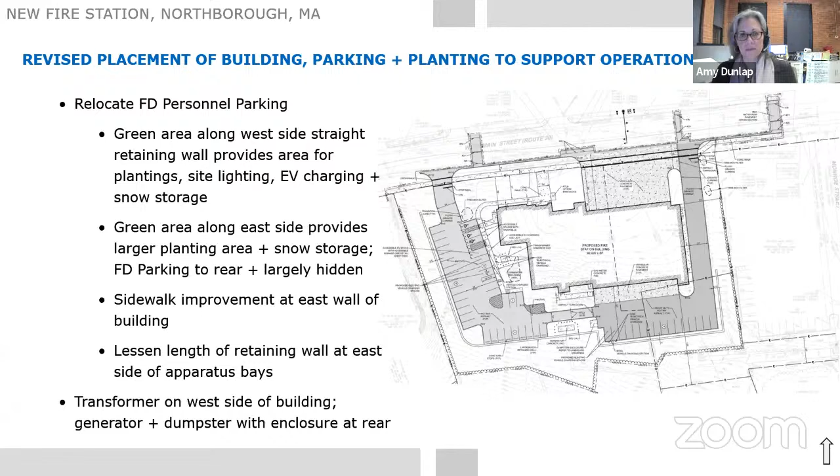The retaining walls were also presented at the last meeting, and I wanted to go through them to show what we're presenting to design review tomorrow. This is the straight wall we've been looking at, although it's been adjusted for the parking change in the back of the building. When we get to the cost estimate portion, the base estimate is based on a straight retaining wall like this, and then we've got alternates for a couple of options we're going to look at.

The straight wall isn't really totally straight here — it sets back about 2'10" from the base to the top of the wall at the high point, back in this corner. And then the overall height is the 30 feet as we've been talking about.

We did some sections through these wall options to help everybody understand what they might look like. This was something the design review committee had asked us to do to get a better understanding. When we presented, I think we presented 4 or 5 options to the committee last time we met, and we narrowed it down to 3 different options for further exploration.

The first was actually this batter wall option. So all of the options we're looking at, the walls on the east and west sides of the site have to be straight walls. There's not enough room between the wall and the property line to batter them or terrace them in any way, so those are always going to be straight walls. The difference happens back along the south wall for the site.

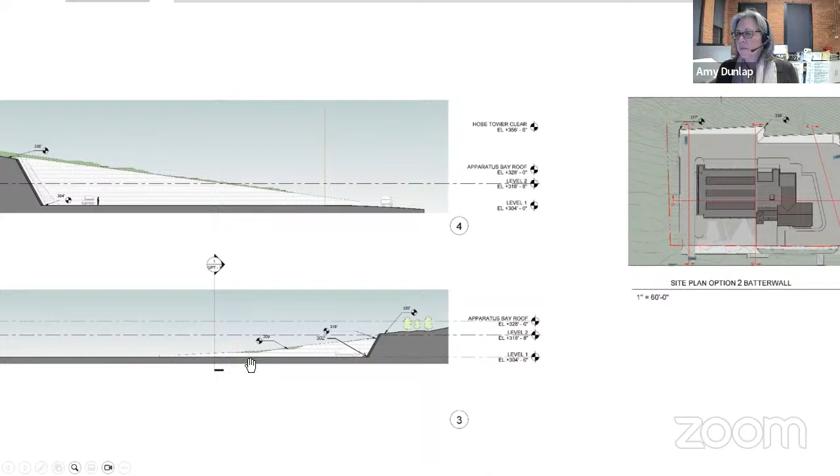This section here is cut actually right over here - it's cut off of my screen, but it's at the low point of the south wall. You can see there's a car parked there. The site is about 18 feet where this section is cut and continues to go down into the corner where it's about 14 feet high, and then it continues to slope down along the east side of the property.

And then looking here, let me actually, before I do that - the next 2 sections I'm going to show you is one cut right through the middle of the building in each direction. So cutting through the building from north to south here. The street is out here, the hill is up here. You can get a sense of the retaining wall.

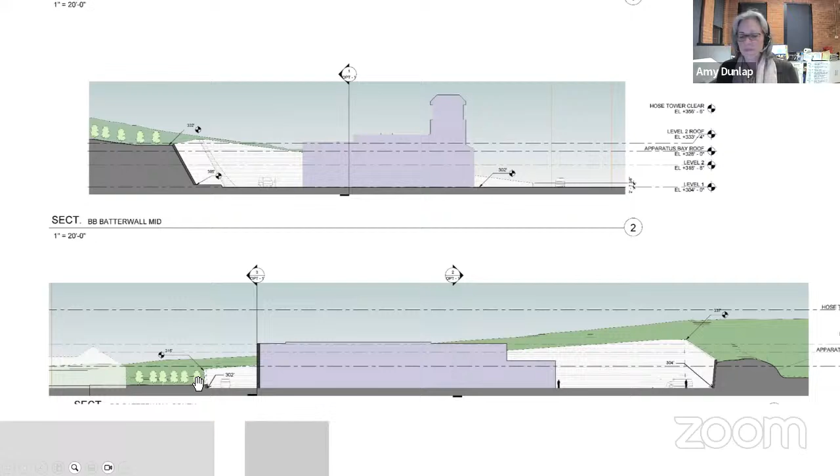The grade is at about 305 at that point, and at 332 at the top of the wall. And then this is cutting through the building, looking back at the retaining wall. You can get a sense of how the retaining wall slopes down from one side of the site to the other. So that's the batter wall option.

The next one that we discussed looking at a little bit more is a combination of a batter and a terrace wall. In this case, we have one terrace located right here, and then the rest of the south wall is battered. Looking at the section here, if I blow it up, we have the one terrace where we could have ornamental trees, shrubs, low plants, and then the wall continues up.

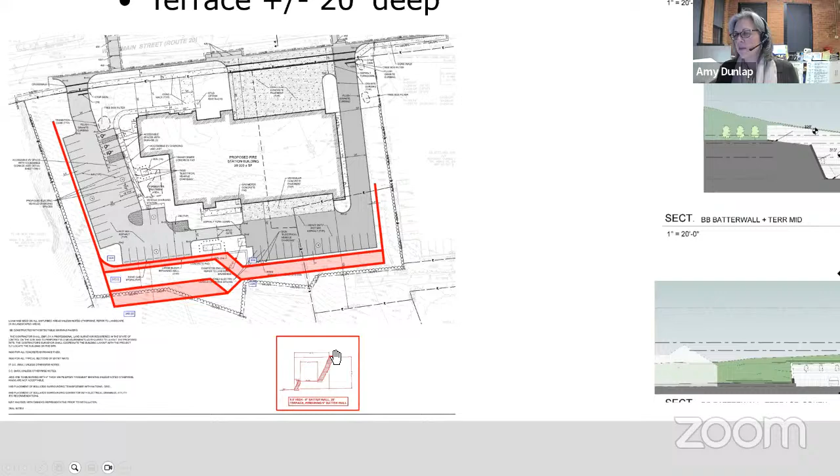And looking at the sections, the same sections we looked at before, you get a sense of that terrace here, which is at about 10 feet high in comparison to a person in a car. There's one terrace here with planting, and then we continue up. Again, this is at the low point of the wall.

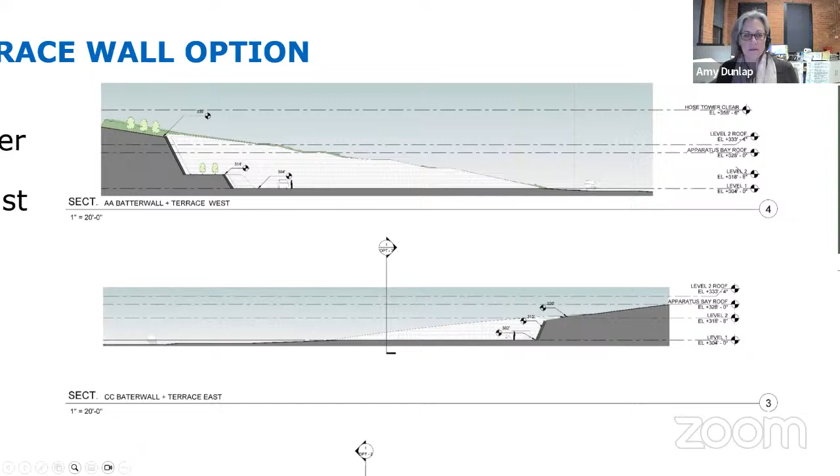And then cutting through the building at this point, we're beyond where the terrace happens, and we're back to a batter wall at this location. You can see the terrace right here in the distance beyond, and then you can see the terrace here in this elevation.

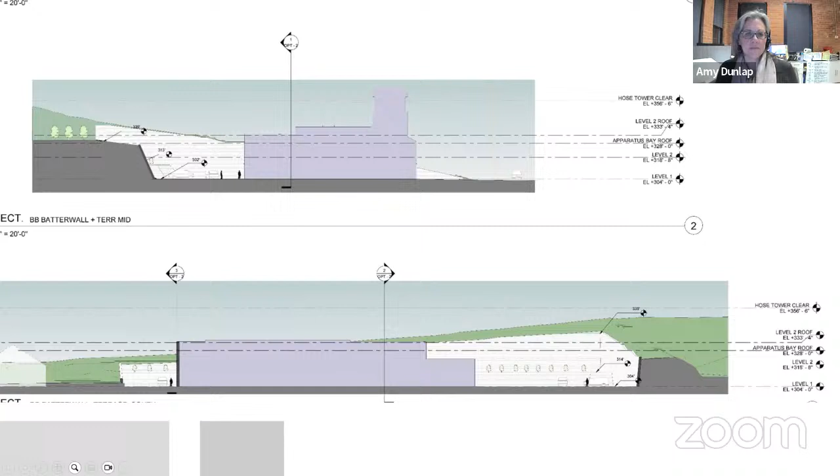This option was something that was developed after we sent the documents to the cost estimator, so we don't have a cost for it. It's something we should talk about when we get to the cost estimate - the estimate is done at a point in time and design continues. So this is something we don't have a cost for, but we do have for the terrace option here. So this is the terrace option.

We've got 2 terraces with planting beds on each of the terraces. You can see in the section here.

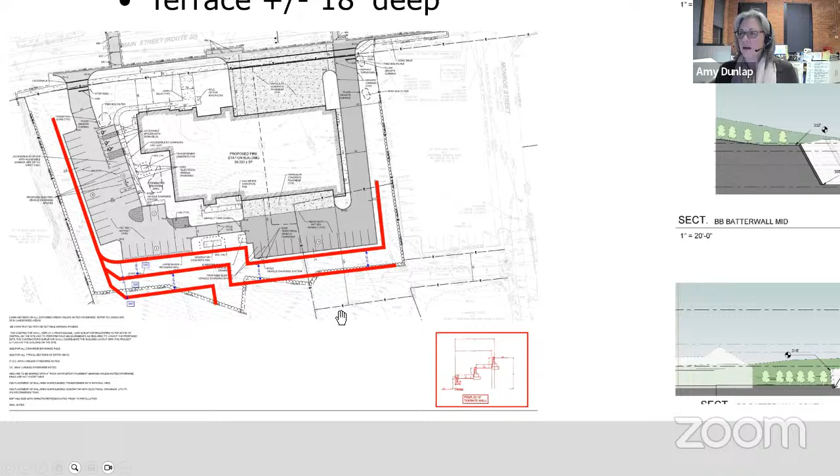One of the nice things about the terraces is that there's access into them from grade. In the previous slide, the batter and terrace wall option, there's no access from grade at the back of the site. There's a wall connecting the two battered walls, so accessing that for maintenance would require a ladder from the parking lot. But in the terrace wall option, you can access each terrace from grade because of how the site is graded.

Let's see if we go to the sections here. Sections do not look right. Those are not the right sections. Yeah, that's my fault, I'll find them.

Keep going, Amy. I think the next slide moves on to cost. Okay, give me a minute then. Let's see, I can find them. Does anyone have any questions while Amy's looking?

I have one question, Amy. What is the height difference in the previous terrace scheme, where you said there's a little wall connecting the upper battered walls? What is that height that prevents connection to Monroe Street?

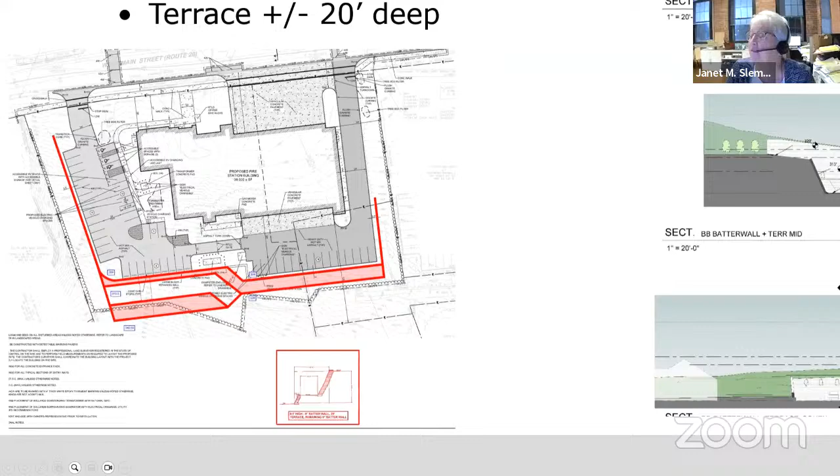Amy, I have them up on my screen. Do you want me to tell you where it is, or how are we going to do this easily? I don't know, I just copied the wrong one. I think I will stop sharing for a second and you can share.

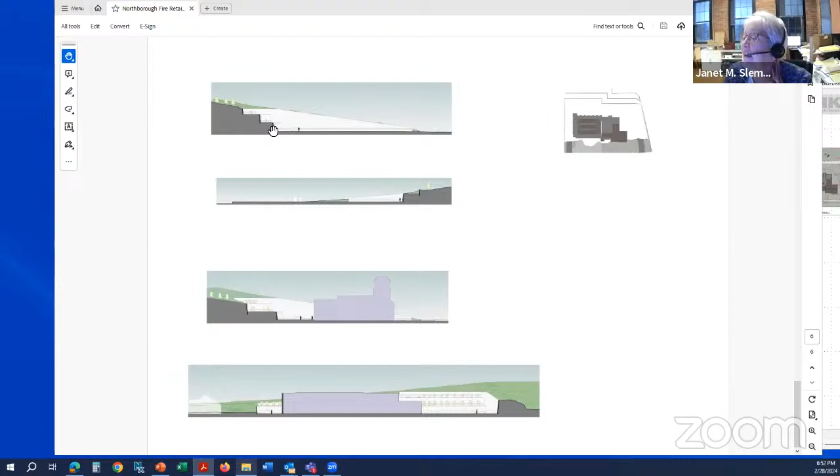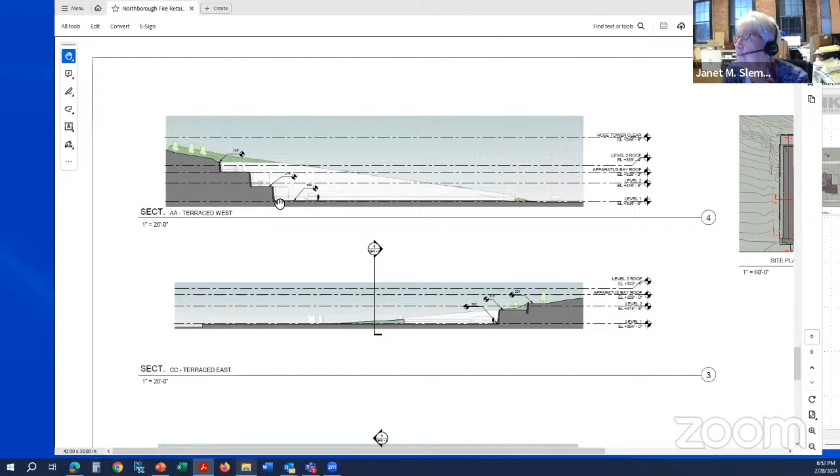Believe me, it's not fancy at this point, but tell me if you see it - the terraces. There's the plans, and this is the terrace, the two terraces at the high point, I believe, and these are at the low point. You can see the person. Let me see if I can get this a little bigger for you. You can see the people here, and those terraces are about 12 feet tall, I believe, between them, maybe. And then here's the building cross section, and this is what you'd see - two terraces here, and one on the back side on the east side.

So is that helpful for everyone to see those correctly? Sorry about that. I noticed that Diana has her hand up - do you have a question, Diana?

I know I always ask procurement questions, but how does this work with the contractor who would be responsible for building the walls? Do they just provide the landscape surface and then the landscape contractor comes in and coordinates that with them? In other words, the people responsible for building the wall - we've talked about how that's really a separate contractor or subcontractor - how do they engage with this landscape component that's between the vertical pieces they're building and the earth they're responsible for moving?

We will have to confirm that, but I think it's just a landscaper that would come in. I think there would be two separate contractors - you'd have the wall contractor, and then you'd have a landscaper doing the planting in the terrace beds. Both of them are under the general contractor. They're both working for him, it's not a filed sub bid at all, it's just a delegated design, so it's up to him to do the coordination of how the things work.

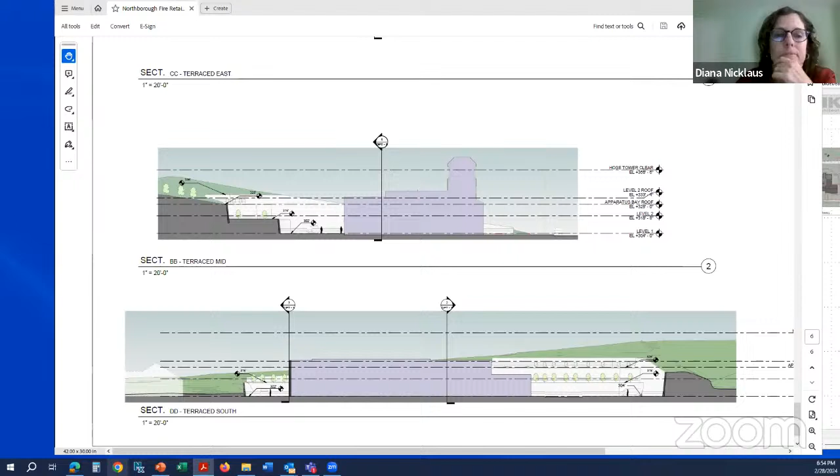Yeah, so I'm going to stop sharing here so Amy can go back. I apologize for too many PowerPoints this week. Sorry, John, I see your hand. One or two, yeah, okay. John, I see your hand.

Yes, a question - Janet and Tom, is this the level of detail that, based on the last design review call, they would be expecting? In your opinion, Tom? Well, we talked about they wanted to see a 3D rendering of the building that incorporated plantings.

That will happen once we get it resolved. We've spoken, we're already in the works and planning that, but we're going to wait until something gets picked. The town does not want multiple renderings.

I think what we heard was, they couldn't understand the section through the site, so the walls to them look too flat or too short. They asked for a level of detail, and I'm just asking, your opinion, Tom's opinion, does this hit the mark? Sounds like it does for now.

I think this, yeah, schematic design, this is fine. I think they also had asked us to look creatively at how to retain that hill, and so I think that's what we did. We looked at multiple options with PAR for what we could do. So this is in response to that.

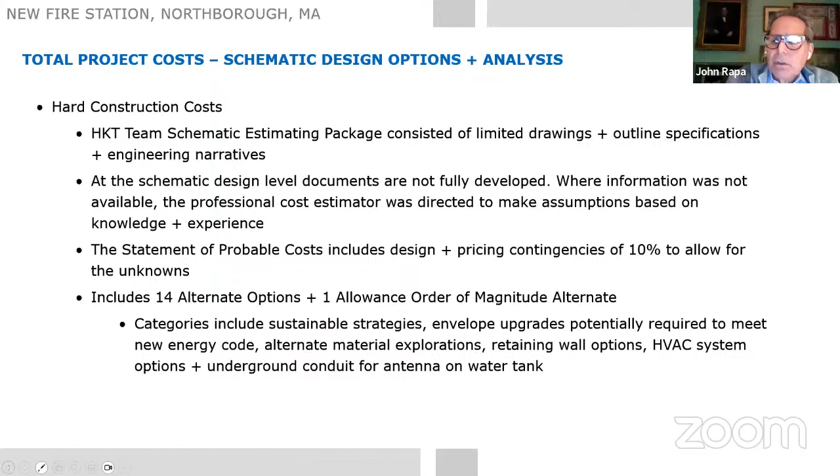So we did ask the cost estimator to price out a number of alternates. We had 14 different alternate options that we will show you, and then one that we're calling sort of an allowance order of magnitude alternate. We've grouped them in different categories to make it a little bit easier to look at and analyze them. So we have some sustainable strategies, which are things like adding PVs to the roof. We're required by code to have the roof, or an area of the roof, be PV-ready for solar panels in the future.

But we did put a cost to actually providing the solar panels. Same thing with electric vehicle charging stations. We're required to have 20% of the parking spots to be EV ready, which is 11 parking spaces in our case, so we asked the cost estimator to price out providing 11 charging stations. Those are the sustainable strategies.

We also have a series of envelope upgrades that we might need to meet the new energy code. As we go into design development, the HVAC engineers will work with us to put together a model to figure out what we need to do to meet the energy code. We have a base design for the amount of insulation and window types we hope to use in the base cost estimate, but we know from similar projects that we might need to increase the insulation, or go to triple glazed windows, and those all have cost implications.

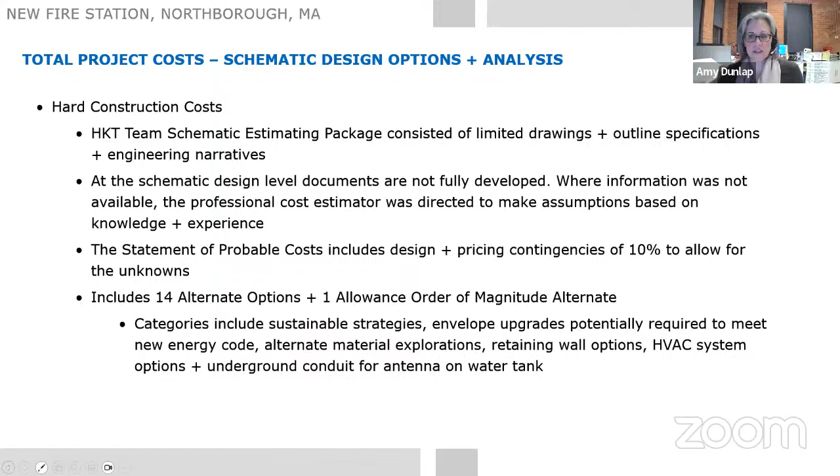Okay Tim, do you want to take this? Sure, thanks Amy. So the other component that makes up our total project cost is what we'll call the soft costs, and we have basically 3 buckets that we pull those from.

These are all the different things that would not be included in your contract with your construction manager or your GC. It's the things that go into the building that you use for the program - furniture, fixtures, and equipment, those furnishings, AV equipment, security equipment, telecom, those items.

We also have fees and expenses - design fees, all their consultants, your OPM fees, commissioning if you chose to go through and commission the building. Any kind of - hopefully we didn't dig into it - but legal costs. Certainly we would have some utility assessments.

And then some costs during construction for material testing during construction, and then we have a contingency for actual construction. So we'd carry a percentage of the project cost for those things that come up during construction—there's always something. And then we have another contingency we call owner's project contingency, which a lot of times is designed for additional consultants that might be required, but it's a separate category not necessarily directly related to implementing changes to the work.

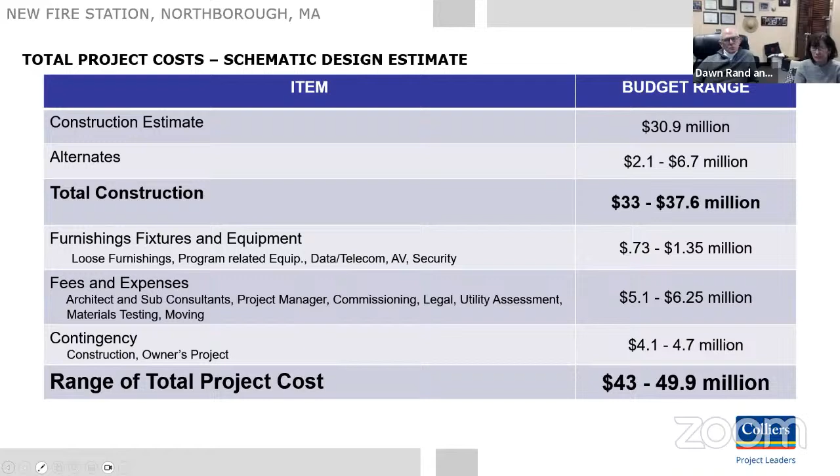Okay. Anything else on this? No, I think then just talking, Amy would take it and Janet would take it to the next level and just talk a little bit more in depth about some of the alternates that they had alluded to earlier. Okay, Janet? Amy, I'm here. Sure, I mean, she's going to lead this one.

So we've got the green options, the energy code upgrades, which are upgrading to triple glazed windows. In some cases, if we go to triple glazing, we have to actually move to curtain wall because the storefront system can't support the triple glazing, adding some additional insulation in the walls. So those are things we really don't know whether or not we might need yet, but we want to have an idea of what the order of magnitude is so that once we get the model done, we can decide whether or not we need them.

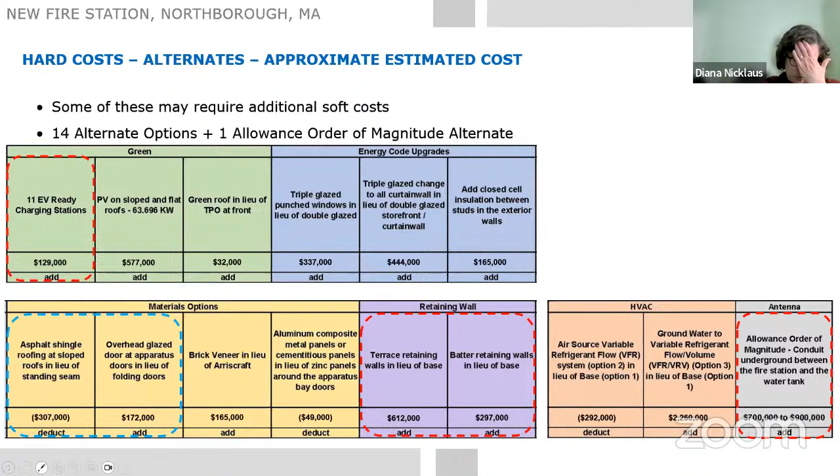I know you guys need this number, you need the information on what to do here. To what extent are you going to carry alternates in the documents moving forward? Obviously you don't want to have a lot of them, but...

I think on this one we're going to show conduit going to 11 different spots, and show a minimum of 6 that we'll carry in our construction number, but we're hoping to get grants, and those locations would be identified. I'd think that would be enough for the planning board to sign off on.

You could determine it as an alternate. Usually they're double-sided chargers that go between spots, so maybe there's only 6 towers for 12 spots, I don't know. But certainly if you can pursue grants and get them - whether it's reimbursement, or sometimes a specialty contractor comes in as part of that grant to install them.

Then you have your operational cost with a service agreement with the provider and that sort of stuff. It gets complicated, or it can get complicated. But I think as far as the permitting process, that's why we need the decision for the planning board. So if the intent is to provide some at a minimum, but eventually hopefully we'd be able to get 11 or 12 at some point to show where they're located. Hopefully it would be enough information for them to approve the plan. And I don't know, Amy or Janet, if that gives you guys enough information.

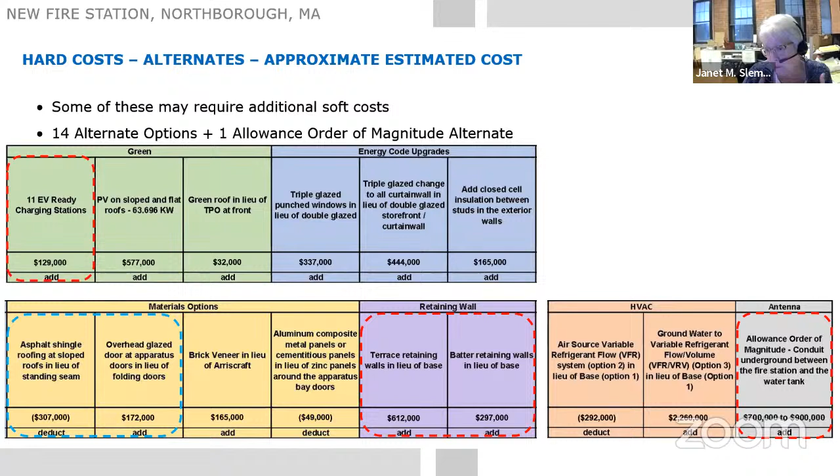If we don't necessarily decide which one we want, we can determine that the terrace is probably out, and it's going to be either battered or a hybrid, since it sounds like the base is really not desirable. Maybe you can cut out the high and low number and work in the middle. Just to remind everybody, there will always be straight walls on the east and west sides - we're just talking about the southern rear wall, so nothing else will change.

So if the battered is, say, 300 - I'm just picking a number - and it was say 450, you're talking $150,000 between the two. If you really don't want the straight wall and you don't want the terraced, that's really what you're deciding between at this point. Is there any real advantage to the batter wall besides the setback?

Just the way it looks. Well, I think you need to consider how much shading is provided by a straight wall versus a battered wall, because you have a high southern slope in the rear of the site, and I suspect the battered wall at a greater angle might allow more sunlight to penetrate to the back of the building and parking areas, but maybe Mark has done some solar calculations.

Not yet. Amy, could you go back to those renderings for just a second? It helps for people to have a visual again. So this is the straight one - at the high point here, where we have the 30-foot high wall, the wall steps back about 2 foot 10 inches from the base to the top of the wall.

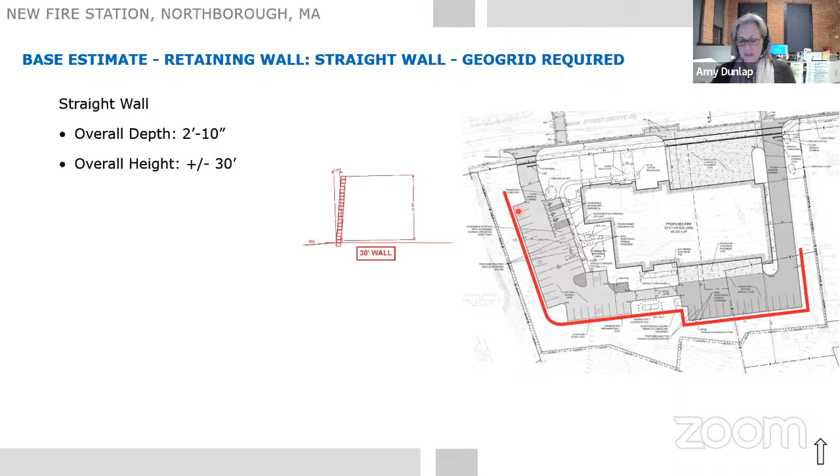Let me think for a minute. So the base wall has GeoGrid, which is required along the entire wall, and that's one of the things that adds to cost here. Where we have the batter wall, we need the GeoGrid on the east and west walls, but we don't need the GeoGrid back here. So just so everybody understands, the GeoGrid is something that as you build up the wall, you have say a 10-foot, 12-foot, 15-foot mat that goes down and gets interlocked between the blocks, then goes into the soil material about 10 to 15 feet. So when you backfill on top of it, it's helping to hold that wall in place. So what that requires is more excavation in order to build that style of wall. It's more earthwork, more labor, more money.

Will we get some details on the base construction cost, particularly in this one? I'm curious what the cost estimate is of the base wall, the straight wall. I don't have that in front of me. Go ahead, Amy. I was going to say it's sort of buried, it's not so easy to pull those numbers out.

I'm looking quickly to see if he has a deduct number, Janet. Let me see. Yeah, obviously we can't deduct it, but it would be helpful to understand, are we doubling or tripling the cost with the $300,000 option, or are we adding 5%? I think you're adding - I'd have to really dig in because it may have been in multiple areas, but I thought I saw that the base wall was about $600,000. Okay, yeah, it is. But that's before adding any of the general conditions and everything, but yeah, you're right.

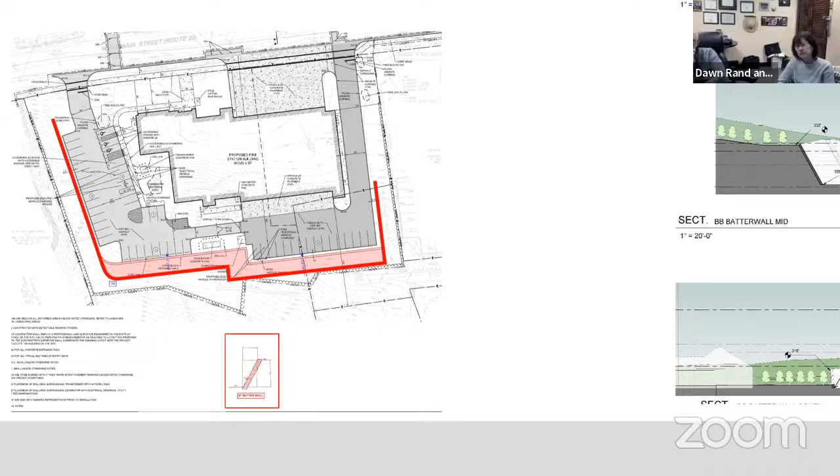John? I just want to remind people that some of the feedback on one or two of the community meetings where we had some of the earlier diagrams, the idea of the specter of a large wall, we got a lot of feedback on in terms of, whoa, that's pretty big. So understanding that the east and west walls are going to be straight and we can't play with them that much, there was a concern of the magnitude of the look of what's going to be there. Now, mind you, the building's going to block most of that view from the street.

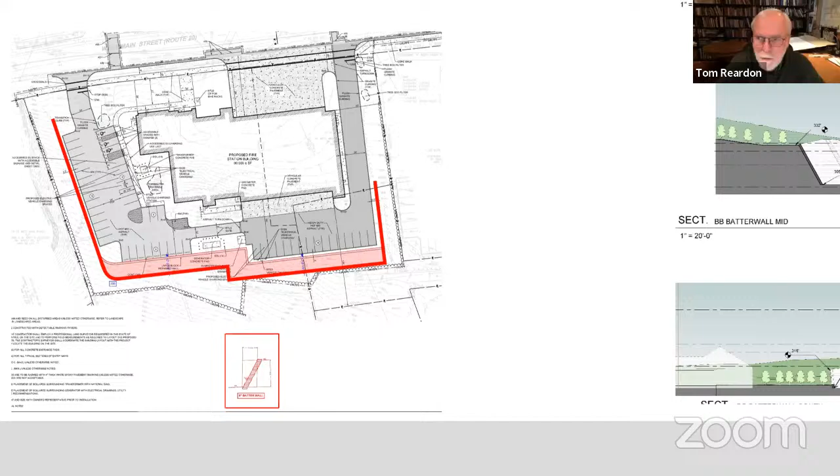Just my batter wall observation - it's also approximately a 70-degree angle, which is the altitude of the sun on June 21. So this would allow you to get some sun in the back. As the sun gets lower, you're going to get more and more shading, especially for the employee parking.

So Tom, your preference would be? I think straight walls on the side and battered in the rear - this option right here that we're looking at. I'm going to take your recommendation on that, that's what I'd go with. Yeah, that's my leaning too. I think you can justify that you really don't see much of that, the building is blocking most of that rear retaining wall, and it's really just on that public parking area where you'd have your biggest opportunity to see it.

So I concur with Tom, it's also worth the premium on the cost. Yeah.

Okay, Captain, where are you? Captain's there, he's just hiding. He's staying quiet.

I am all for the straight wall - I'm all for the battered wall, I mean. I don't think we should look at the terrace wall if it's going to be that much more, because we're already looking at a large price tag for this project. I agree. So by agreement, the battered wall? Yes, yes. Okay, all right, that takes us to...

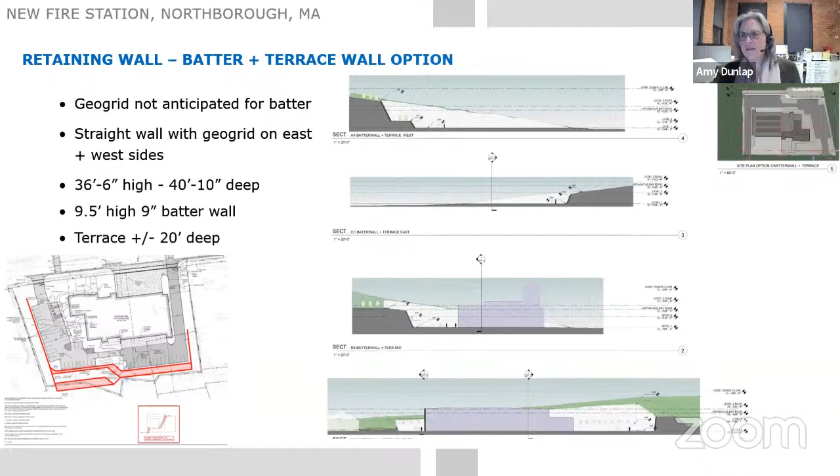Oh, the tower, I think antenna - excuse me, Dawn, I think Neal had his hand up. Oh, sorry, Neal. Neal, you got your hand up?

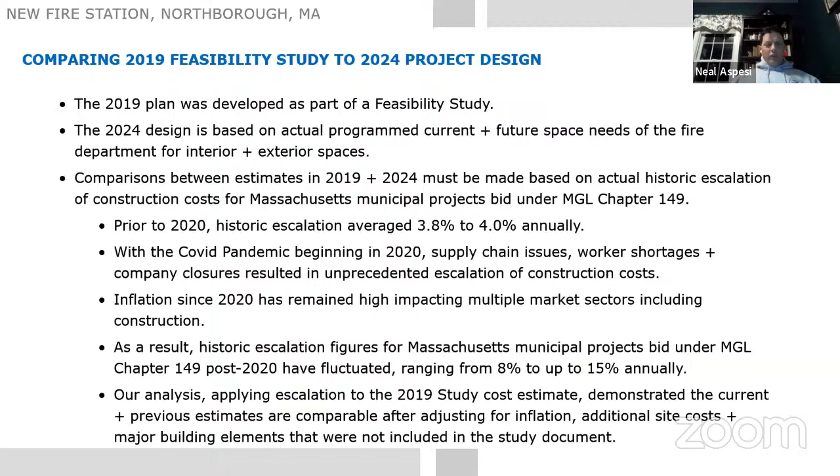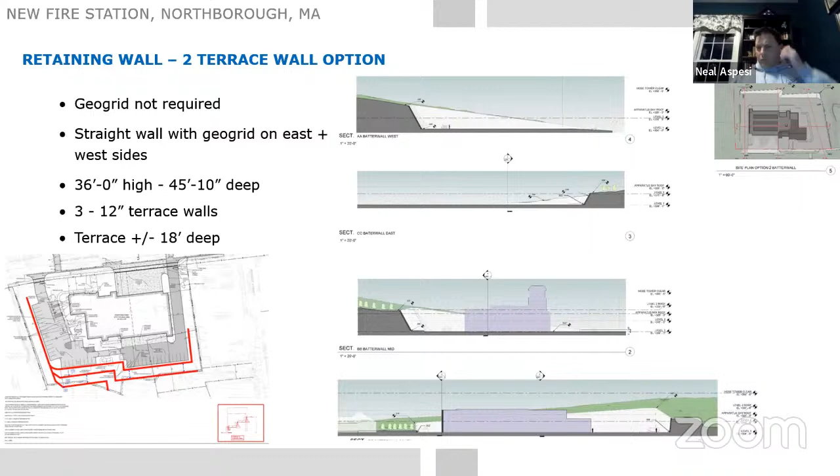I did, yeah. I just had a question - when you're looking from the street side on the public side, you're also going to have trees in some of that area, correct? So that'll kind of block a little bit more, like along the building. Yeah, trees and such. That'll help.

Sorry, I'm trying to get my pointer here.

So yes, there would be some trees in here, so that'll help block it as well, plantings. Okay, thank you. All right, so that's by agreement, and it brings us to the antenna on the water tower.

I think the chief would like to address that. Yeah, because it was the chief's idea to do it in the first place.

One of the things it was trying to address was a line of sight issue from our antenna at our dispatch center, which is at the police department, to potentially a microwave off the top of this tower, which would provide us with some additional capabilities and improve some communications issues we have. However, in no way can I justify a cost of $700,000 to $900,000 to address that issue.

More importantly, myself and the police chief and communication supervisors are already in talks of a long-term plan to improve our communication system throughout the whole community. So I think it would make more sense to put, and I've talked to Amy and Jenna about this, we already have in the plan brackets to put, for lack of a better word, antennas on top of the station.

With that in mind, my recommendation would be we go with that. And then in the future, either through a grant process or through the process of developing, expanding, improving our communication system throughout town, maybe then we'll want to say, hey, yes, we do want to invest and do it, but there may be a different way to do it than conduit.

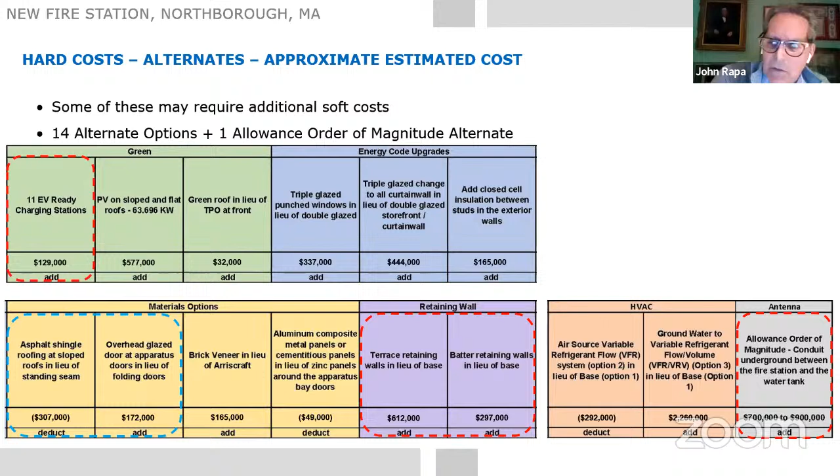John? Chief, the main thing is your communications with the police station back and forth, yes? Yeah, so, well, yes and no. It would also help with our frequency and the police frequency, it would help with both frequencies by putting that up there.

Our alternate dispatch site for both police and fire would be the new dispatch area at the fire station. So if they were to go down, we'd want to be able to hit the tower at the police department to get out.

Now, are there other ways to do that? There may be. I think we can look at that by fiber and some other options that we may possibly be able to look at.

I was going to say, there's got to be fiber going down Main Street. There is. There's probably fiber to the curb that Verizon or whatever has. Yeah, not that far down.

So one of the intents and part of this project would be to complete the run from where we currently are, where our own town fiber ends, to the station. That would be part of it.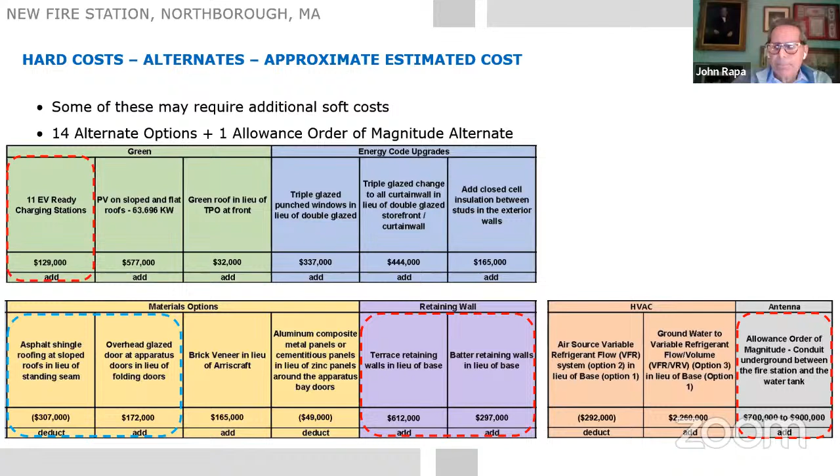So with the chief saying that he's not in agreement to doing this at the cost, is everybody okay with taking this off the table? Yes. And again, that goes back to, would I love it? Sure, I would love it. It's a great want. My needs are in programmatic, and that's where our needs are, and that's where I want to focus things.

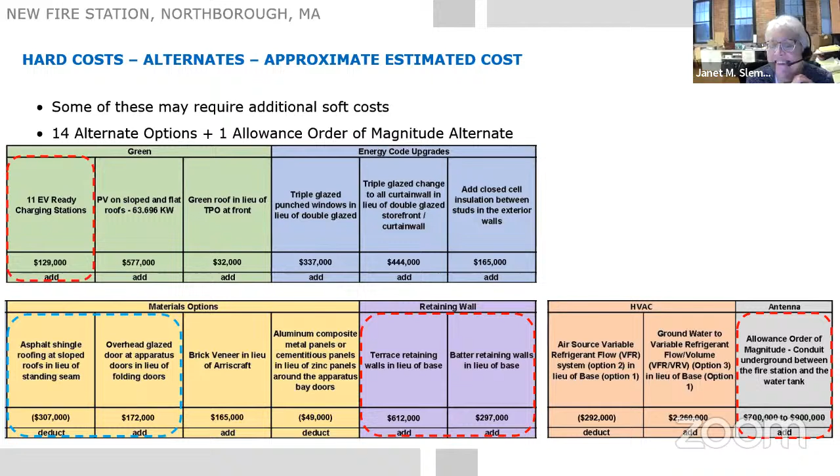Okay, so the agreement, everyone? Yes. All right, that. We already saved $1 million. We're good. Okay, back to the shingles.

I think there's a couple of questions there as far as the age of the shingle, what was spec'd out as far as what we're looking at. So we could deal with that next week instead.

Yeah, I think that's fine. Hopefully we'll have more information on all the material items to talk to you about next time we meet. Again, to summarize, the HVAC items and the PV items, we'll talk to you more about when we have the life cycle cost assessment from the engineers. The energy code updates we can talk to you about when we have more energy code modeling done, so we know what we need. So I think we're good for right now.

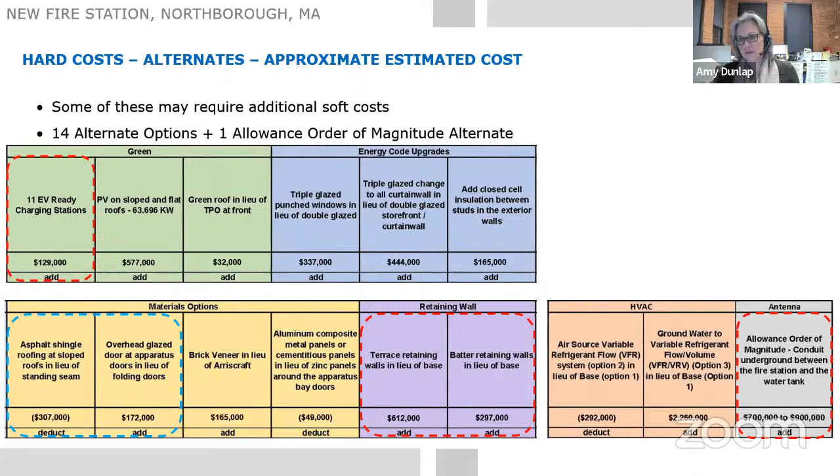Hey, that's great. Tom's got his hand. Tom, I think we should include the folding doors at this time and not leave it as an open item, because it doesn't make sense to put in overhead doors for an extra 172,000 if we like the folding doors to begin with. I agree with you.

Could I just speak to that real quick? I concur.

So today, myself, the deputy, the captains were at a seminar in Worcester, and part of this seminar was a show. And there was a folding door company there, and I specifically asked them, is there a concern with folding doors in New England?

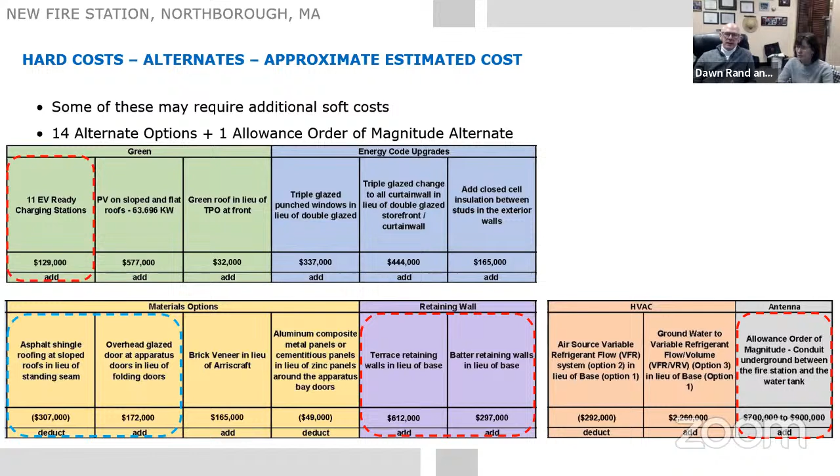Because that was one of the questions that came up from some different people. I didn't think there was, but I wanted to check. And they said no, as a matter of fact, and they showed me all these fire stations throughout New England and Massachusetts that are going forward with folding doors because they're better. They open inside, they operate better, they're quicker, they're safer. They said more and more companies, more and more departments are going with those. But I did ask that specifically to see if it was a problem in New England, and they said no, it's not. So just to let everyone know.

So by agreement, we'll stay with the folding doors. Agreed. Yes, okay. And one last thing, I would recommend we keep the standing seam roof, even if you get better information about the asphalt, because if you're looking at life cycle costing for the building shell, putting an asphalt roof on is not a good idea.

Maintenance, difference of materials, flashing issues. If you notice in your neighborhoods, they're all streaking because the quality of the asphalt shingles is in decline. They're disintegrating faster. I wouldn't touch it.

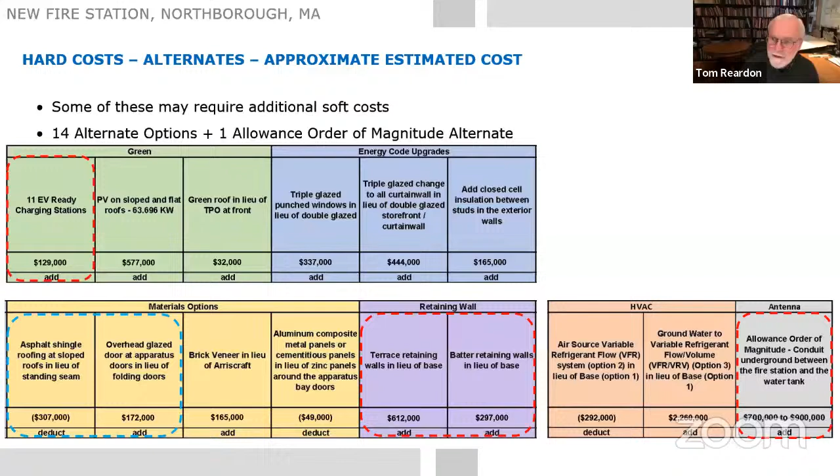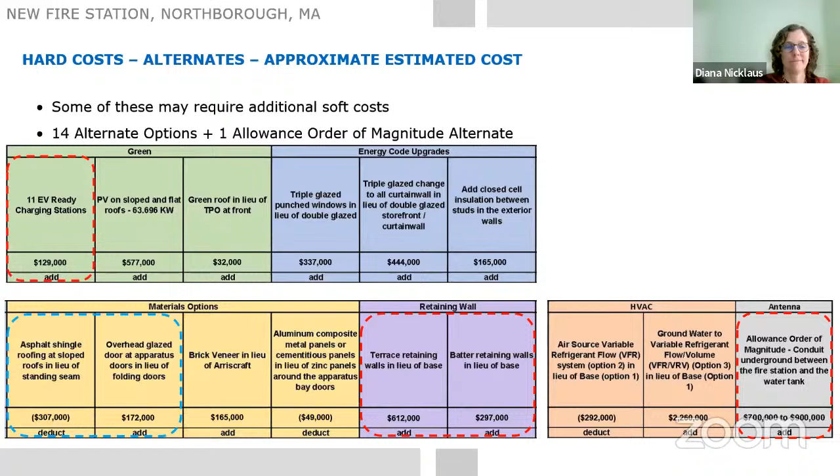Okay, does everybody want to take this up right now too? Sure, why not, I agree. Anybody else? I concur. I also agree, working in a leaky building as we do now, I like the metal roofing. Okay, so we can put that one to bed too. Good, agreement, thank you.

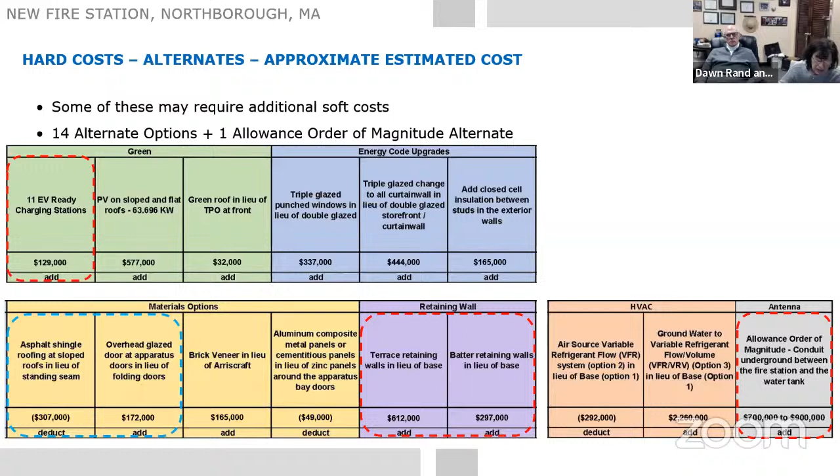Okay, so the next item that we have is schematic design sign off. Now wait a minute, we still have, Amy, you have more slides. Oh, there's more slides. We're not done. I like slides.

So we just wanted to update you on the schedule. We've talked about some of these things. We are going to the design review committee tomorrow morning. Please come, please come.

So I do need to speak to that. I did check with the chair of design review. She indicated that it was okay for myself and the chair and members of the design team. She did not want the other members of the committee there, she thought that was too cumbersome. So myself, I know Dawn's going to be here. The deputy probably won't, but it'll be us and then the members of the design team.

I'm flattered to be excluded. So go ahead, I apologize.

No, that's great. Okay, and so the zoning board we talked about, we're preparing the package. So the meeting isn't until March 26th, but the documents are hopefully going to be submitted by this Friday to the planner. And then we are moving ahead with your approval, we're going to move ahead with design development. We do have some meetings that we, Janet, I don't know if you want to talk about this. Item number 4, we had a committee meeting next week.

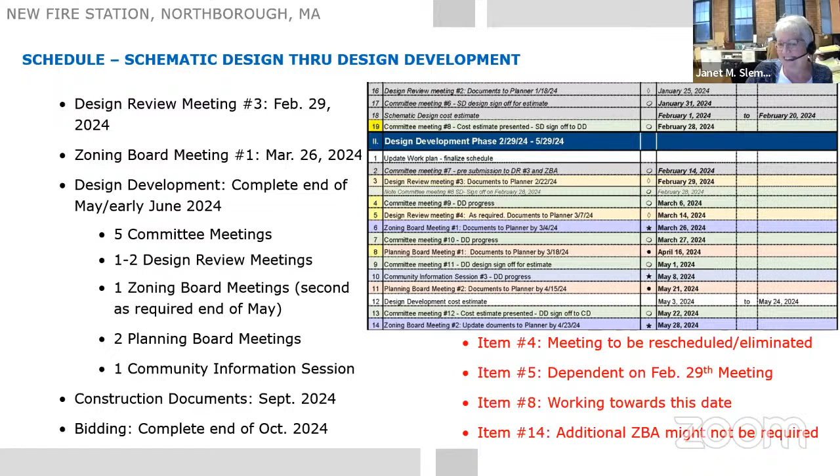About Amazon, don't they need the number? It's a bylaw. Doesn't the post office assign the number? No, actually the assessor. Ours is done through assessing, and then by agreement with the police chief, fire chief, and the office. So I think it will be on the sign, and it is on the sign, in lettering. Mark can confirm that, but the actual number is not.

I can get that in motion where we can talk about whether it's going to be 61 or 65 or somewhere in between. Okay, I'll work on that. Do we have 65? I see 60. We have 65 there. It might not be the correct number, but we do have it there. We show 65 West Main right now.

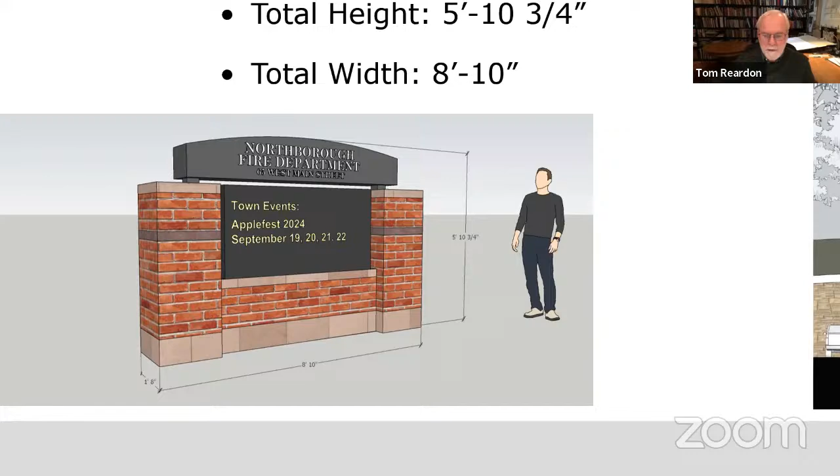Great, thank you. Okay, what else, Tom? That's all I have. Okay, do I hear a motion to sign off on the design?

A question, if I could, before that: does that prevent us from looking at any potential value engineering at this stage, as we were just talking about? I'd like to hear that from the architects. No, I don't think that does. Janet said no, and Amy said no. For what it's worth, you can value engineer construction also. Yeah, so we have plenty of time.

Do I hear a motion? I move that we accept this schematic design. Second. Okay, Dan? Aye. Tom? Aye. Diana? Aye. John? Aye. Mitch? Aye. Chief? Aye.

All right, that brings us to public comment, limited to 3 minutes and must be related to an agenda item.

Chief, you've got one written comment. Would you like to respond to that? Yeah, so I gave it to you, didn't I? Hang on, I've got to find the thing I gave her. So we did receive an email, and the question was, I just watched the recording from the 2/14 Building Committee meeting. Before I read too much further, when we get these emails, we don't respond to them until we can have this meeting, so I just want to make sure people know that. We're not ignoring you, but if you send us an email tonight, you're not going to get a response with an answer until we've had a chance to discuss it.